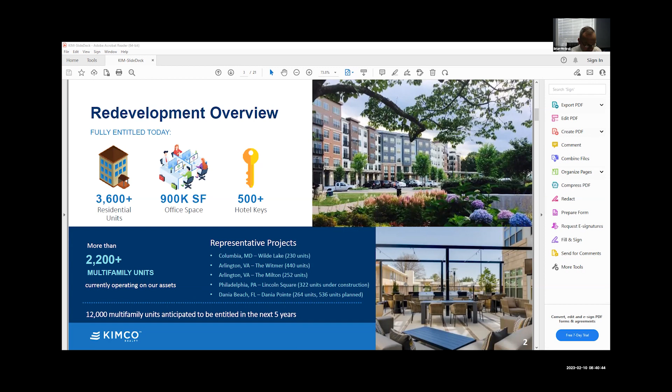In fact, Erica Kinder, our Community Economic Development Director, wrote a memo to the zoning board, and she did express concerns as to the size and the parking being provided. She did point out that the property is in the Junction District, and that this multifamily housing development fits within what the housing production plan is hoping to achieve.

So it really does fit within, for lack of a better term, the railroad district, within walking distance to the railroad. It's located just outside of Wakefield Center. It is not a desirable retail location. As Don mentioned, Kimco has a real background in that—that's what one of their divisions specializes in.

You might have seen a sign up there for years trying to market it for retail type use with no success, no interest whatsoever. They have all the major retailers that they do business with, and smaller retailers too, and they have not been able to have any interest from a retail perspective.

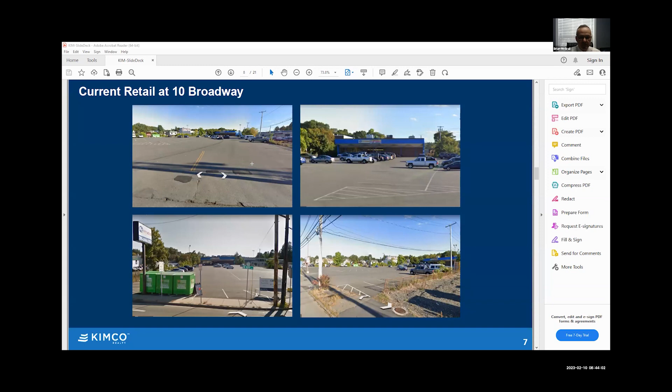As I mentioned, this is just outside of the downtown area, so it has an opportunity to bolster the local businesses in Wakefield Center. It will be within walking distance to the downtown. As we've mentioned, it's going to have an 18% affordable component. We're hoping to create an attractive frontage on Broadway and North Ave compared to what's there today, as a gateway into the downtown area.

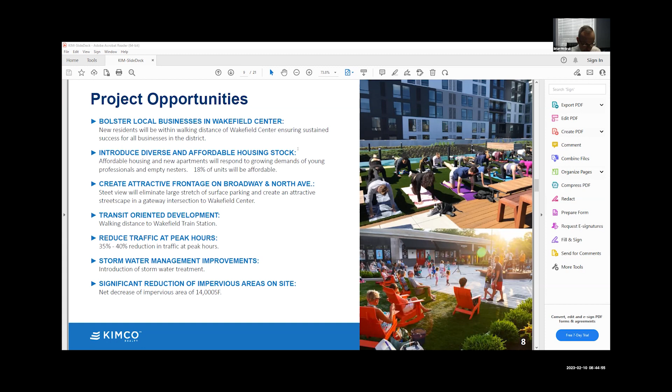It is a transit-oriented development, walking distance to the train station. As Scott will talk about, there's actually a reduction in traffic on peak hours from what is going on there today, which really isn't a major concern for the TAC, but there will be stormwater improvements. There's actually no stormwater treatment on the site today, it's just straight pavement, and there'll be a significant reduction in impervious area at the site.

So as I mentioned, we talked about the units and the density, and what we originally had proposed to the zoning board was 124 units. We did not meet the parking requirements under the zoning bylaw for that size project. We were approximately 40 spaces short. At our initial hearing with the Zoning Board of Appeals, it made it pretty clear to us that what we were proposing as far as density on the site was not acceptable to them, and it was also not acceptable that we would not meet the parking requirements under the bylaw.

So what we're in the process of doing is making some changes to the plan, which will have a reduction in units. We don't know the exact number yet, probably somewhere around 105, 106 in that area. But at the end of the day, it will also meet the parking requirements as required by our zoning bylaw. So when Scott presents today from a traffic perspective, it's a worst case scenario at 124, which we do know is going to be reduced.

I also want to say we spent a lot of time with Fire Chief Sullivan and Deputy Chief Purcell on the layout of the site prior to filing. We appreciate their time on that. And I think, from an access point, fire safety, they were pretty appreciative and pretty satisfied with where we stood originally. And again, the project is only going to get smaller.

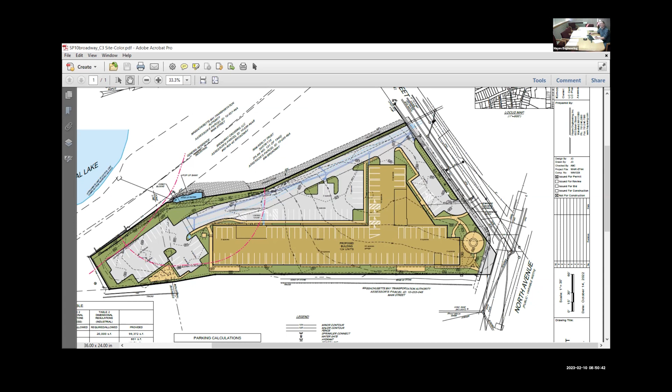There's also a loop in front of the building with some parking in the front, and that will be one-way. It will come through and be exit only at this driveway opening, with a right turn only.

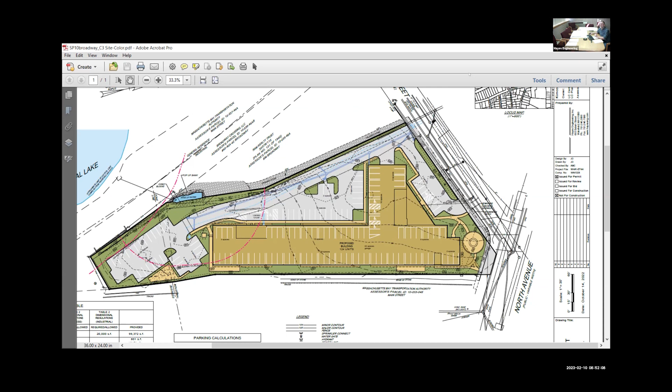Scott, do you want me to use the slides that we used with the zoning board for you? Yeah, sure, that's fine, thanks Brian. That'd be helpful. There you go, Scott. Yeah, there we go.

Again, for the record, Scott Thornton with Vanasse and Associates—we prepared the traffic assessment dated, I think, September 2022. I just have a few slides to go over, starting with this one.

Brian did a good job explaining the site characteristics and the location in proximity to some of the activity centers for Wakefield. You can see on this map the four study area intersections, which we confirmed with the town engineer and with VHB, as well as the Wakefield station commuter rail stop located about 0.4 of a mile up North Ave from the site, and the MBTA 137 bus stops on either side of North Ave at the Main Street intersection. The site has pretty good transit access, and that'll be promoted in marketing materials for the site.

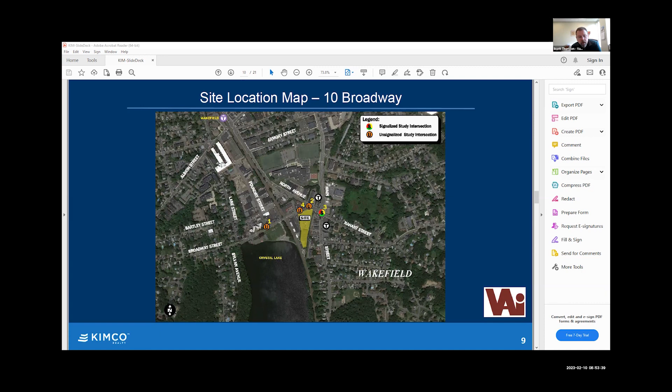We did traffic counts at these locations in February 2022, including the site drive for Mike's Gym. Fitness centers can generate a lot of traffic, and Mike's does. During the morning and evening peak hours, we observed 59 trips total in the morning and 74 trips total in the evening, on an entering and exiting basis. For entering trips at Mike's Gym, about 80 to 90% come from North Ave, making a left turn into the driveway—that's not great, and it causes a lot of friction there. Also, the existing site driveway is pretty wide at 65 feet, which isn't great for definition or for pedestrians trying to get through the area.

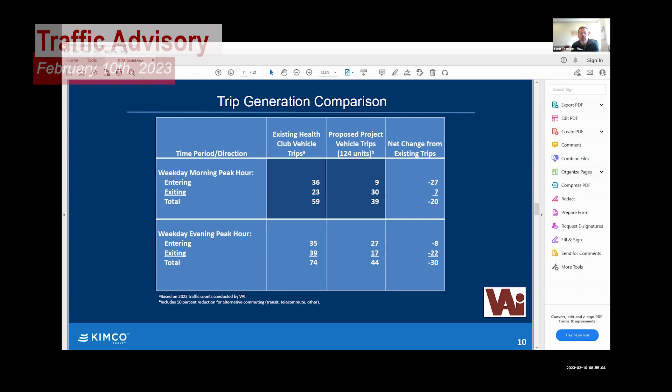Back to the trips—we did a trip generation projection based on 124 units, and took a 10% reduction for transit given the site's proximity to those other transit locations. Compared to the existing Mike's Gym site, we expect the development to result in a decrease of 20 trips in the morning and 30 trips in the evening. If the site is downsized from 124 units to somewhere between 100 and 110 units, these numbers, as Brian indicated, will be conservative.

So the site would generate even fewer vehicle trips than presented here.

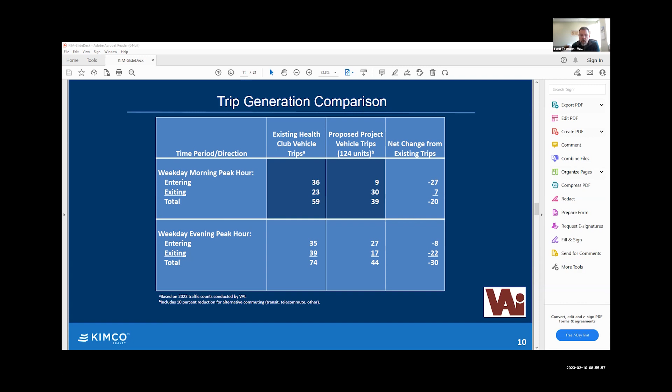So then the next slide just kind of wraps it up. It's a reduction in traffic level from the current use, good transit situation with the reduction in traffic for the site. You have level of service at the intersections that we reviewed. Operations are either the same or improved slightly due to the reduction in traffic. I think from a traffic perspective, it's a good story that development of the site as it stands today would be an improvement in traffic conditions.

So I'll turn it back over to you, Brian. Thank you. And I think that's also an important factor with the morning peak, because that's where the conflict would arise with the middle school.

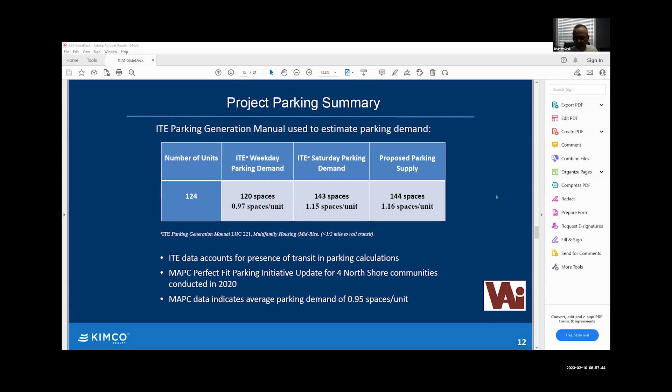Okay, so Brian, how short were you on parking spaces with the 124 units? We were pretty short, I think we were 40 spaces short. John, is that about right? Approximately. Scott? 45. 45. Yeah. Even with a parking garage, huh? Yeah, we were short.

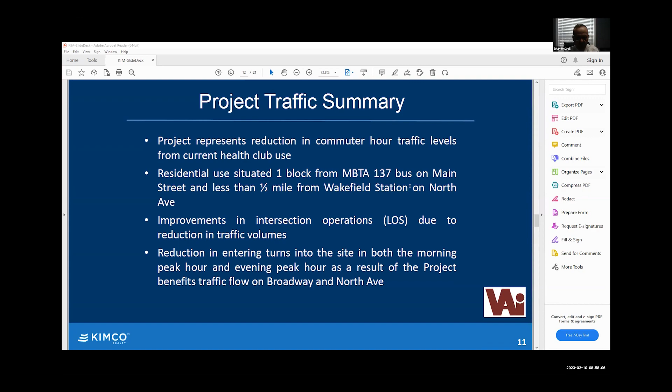Yeah, so because we can't, with the groundwater there, we don't really have an opportunity to go down, to go subsurface, if you will. So, in the unique shape, as we kind of talked about, and kind of going back to this, the unique shape of the lot really limits it.

So we made a passionate plea to the Board of Appeals because of proximity to the train station and walking, and we met the ITE standards for parking requirements of a project of this nature. And Scott made that presentation to the zoning board, but to be honest and quite frank, they weren't buying it. They gave us a mandate and they said, you got a non-starter here. So, reduce the size because we think it's too big to begin with.

And at the same time, that's going to help you meet the parking, which we're going to require you to do. Gotcha. Okay, no, and I agree with that. I think that's always our concern. One of our concerns with development of this size is, where are people going to go if they have no place to park? So if that's already their mandate, it sounds like you're working toward that goal as it stands right now.

I don't dislike what's proposed, and I agree that it may have a trip generation that's quite different from a gym, but it's not so much what's being proposed, it's just the area itself has a lot going on. So I think no matter what you put there, there's a lot of traffic there. There's a lot of traffic when the train comes through and it backs up onto Broadway toward North Ave. You have the middle school there, which is even in the afternoon hours, early afternoon, there's a lot of traffic caused by

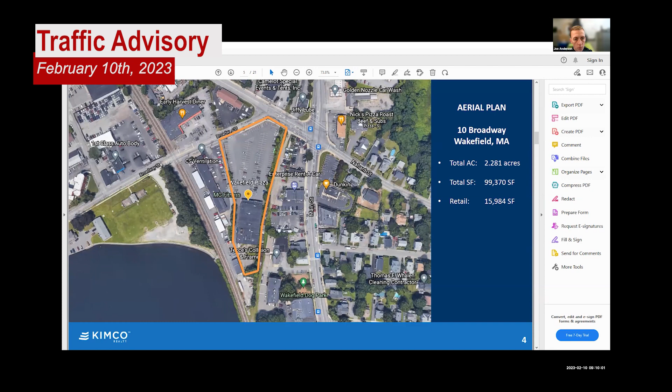There's a building there too, so it's not just a sign, it's the road geometry. So I think overall that intersection, and then the overall flow of the main intersection of Main, Nahant, and North Ave needs to be looked at. So whether it's a signal, whether it's using some of the property at 10 Broadway to create another lane, I'd like to see just a little bit more on that.

And then obviously the parking counts, I'd be curious to see where those come in at with any reductions that the developer considers. Yeah, Lieutenant, we can take a look at those items. And I'm doing the same thing, Matt, just pulling it up on street view. I'd be curious to see where the right of way line is in relation to the shrubbery and the sign, because the sign sure looks like it's got to be on private property. So we'll take a look to see where the public property ends and the private property starts.

Is there any sidewalk between North Avenue and Broadway where the Felitti building is? Any sidewalk at all? On the north side of North Ave, but not in front of the Felitti building.

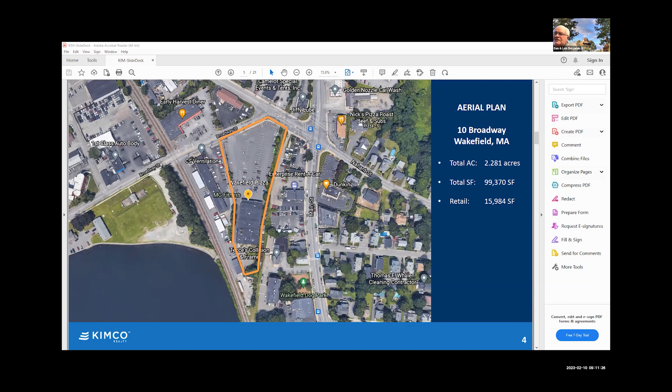All right, any other comments or questions from members of TAC? If I may just make one comment, going back years ago, there used to be access to, I think it's a paper street called Railroad Avenue. And I think it runs in back, if you notice by the railroad tracks at Crystal Lake, the three white kind of triangular shaped buildings, they used to be old Quonset huts and they rebuilt them. But is there a roadway that goes beside them that's called Railroad Street? And I think they have it through the...

No, there's a road that stops at that right of way line. We explored it during the train horn situation back in the day, to see if we could have that as an access point. And the MBTA said basically it's a non-starter to have a crossing there, so that's not happening. So there's one because the street comes off of Main Street. There's like that. Yeah, and it turns around in back of the building. Yeah, it doesn't route behind those other buildings though. Yeah, it never did, or maybe it did at one point, but ultimately there's no access now. And the MBTA has told us that's not going to happen.

All right, I'm going to open it up to members of the public. If anybody has any comments from the public, if you could raise your hand, state your name, and we'll give you 3 minutes to present. So anything on 10 Broadway from members of the public?

Hearing nothing from the public, Brian will close out. We're happy to take a look at the issues raised by the TAC. If it's okay, we can work through Bill Renault in town engineering, since he has access to Matt Keeley. We'll run our findings through you, Bill, since you'll vet it with Matt anyway. Sounds good, that works. Hopefully we can get some answers and see what we can do.

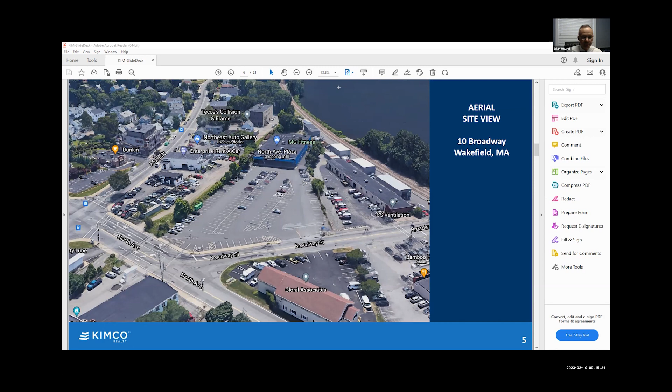All right, so we're going to close out item number 5 and move on to item number 6. Unless Brian, you have anything else? No. All right, thank you very much.

Item number 6 is 314, 330, 336 Salem Street - a new development assessment and site plan review for a proposed 3-story, 19-unit apartment building and 1 new single-family home. So kind of a different one. I'll let Brian McGrail present.

Thank you. For the record, Attorney Brian McGrail, representing Granite's Family Trust LLC, under agreement to purchase the properties at 314, 330, and 336 Salem Street. With me today is John Ogren from Hayes Engineering, our site civil engineer, and Bill Bergeron, also from Hayes Engineering, our traffic consultant. On behalf of Granite's, Bill Mandel and Jim Cook are here; they're the ownership entity. It's almost overwhelming to explain the mix of existing uses on the combined properties - it's really a tangled web. There could be a textbook in poor planning, and this proposal is an opportunity to clean things up at this intersection at Salem Street and Lowell Street. I'll do my best to lay out the existing conditions and then get into what we're proposing.

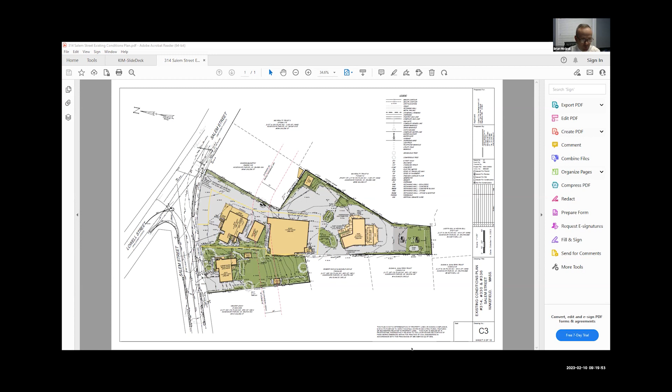Because right now, I'm going to switch maps if I can, to show you what's actually happening on the ground.

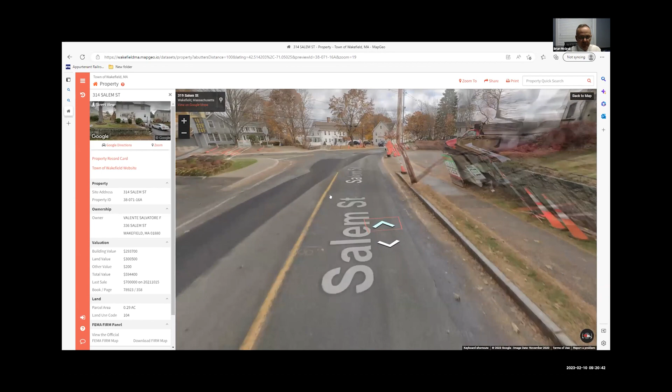So this is 314 Salem. It's a two-family house. It's got its own drive, its own curb cut on Salem Street. And as you come around, on the opposite side you've got the Prime gas station.

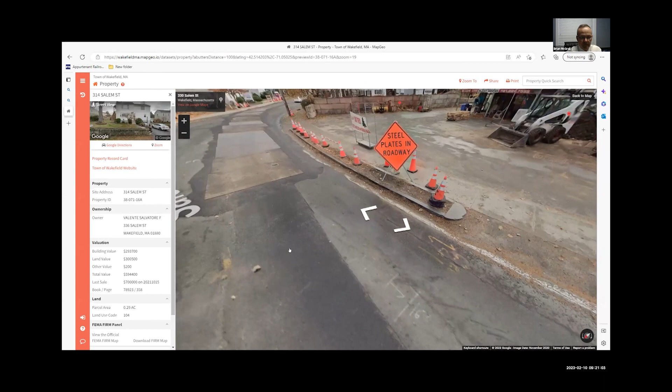This is the 330 property, and you can see it has two curb cuts. So now you've got 1, 2, and this is a wide one. Then you've got another curb cut, and this curb cut is kind of a common driveway that serves the 4-family building and the storage stuff in the back, and also the single-family house way in the back. So you really have 3 units, and a bunch of different stuff going off the site.

Some of the neighbors across the street have attended the zoning board and talked about what's going on here, and how they're very encouraged about the opportunity to improve it and organize the site in a tidier fashion. It's an opportunity to detangle this web.

The property up front is partially in the business district, and in the back it's in the single residence zoning district, hence the two single family houses out back. It's a very challenging intersection, as I'm sure the traffic advisory committee is familiar with.

Historically, there's been a number of zoning complaints going back to Jack Roberto's day as building inspector. He was out here quite a bit, and because of all the stuff going on he determined it was legal non-conforming. There's really nothing that can make it not happen, but there's certainly something we're talking about now that can actually improve it.

When you look at all the residential units there today, 9 of them, none are categorized as affordable units. Our proposal, out of the units we're proposing, 18%, or 3 of those 21, will be affordable and go to our housing inventory.

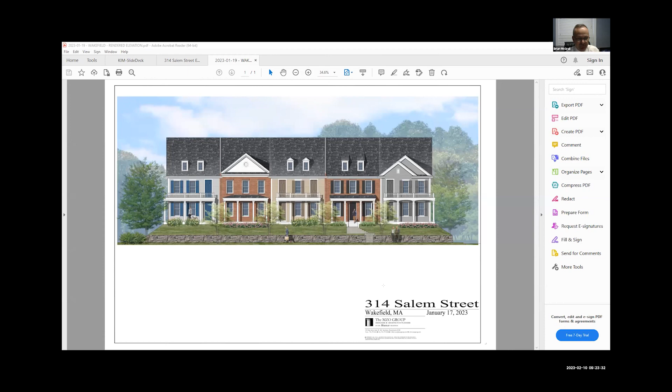Something we're aiming for, this is not at all final, but we're aiming for something like this - this would be like a front elevation. So this is a multi-family building, but to give it a townhouse feel on the front, with kind of a wall, and when you look at this, it's really going to be like a 2.5-story building from the front to kind of fit into that area.

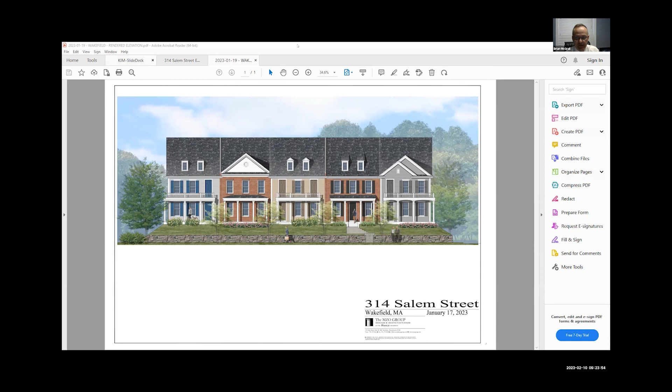But higher in the back where we really wouldn't impact people, with parking underneath, which John will get into, and so will Bill, as far as laying this out. So with that said, I hope that sets the table. I'm going to hand it over to John. I showed you the existing conditions, and now John can show you what we're proposing, and we can talk about the traffic impacts and benefits. John, all yours.

Yeah, unmute, John. John Ogren, Hayes Engineering. I think Brian did a good job of explaining a very confusing existing condition site.

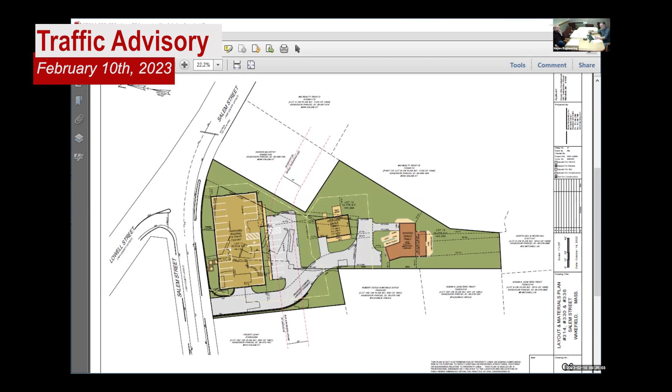So I'll just jump right into what we're proposing. As Brian said, we're reconfiguring some of the property lines to create 3 lots. There's existing 3 lots, but we're reconfiguring those, and that's in the yellow here. This front lot will contain a 4-story, 19-unit multi-residence building. It will have parking on the first level, and it also will have additional surface parking behind the building. So there's 24 in the parking garage, and 9 spaces outside, for a total of 33 parking spaces.

The zoning requirement is 1.5 spaces per unit for 2-bedroom or less, so it would be required to have 29 spaces. So we actually have some additional spaces over what's required.

It's probably best to go over in the front, and Bill Bergeron from our office will go into this a little further, but there's an existing curb cut here, an existing curb cut here, and then the existing driveway to the existing 2-family here. We're essentially utilizing just this curb cut here, and these 2 curb cuts will be eliminated. That driveway provides access to the parking garage and to the parking behind the multifamily, and also provides driveway access to the new proposed single-family residence and the existing single-family residence here.

We did look at this in terms of - these are at a minimum 20 feet wide for a driveway. In terms of access for say a fire engine, they can pull in here. We did some analysis, and they can pull up here and actually turn this around and come out straight, and they don't have to back out onto Salem Street.

Definitely makes a difference, so I think the trip generation is a little bit higher than what's in the memo. I don't think it's going to change the conclusions, but just in terms of us signing off on this, I do want to see the updated numbers for the 11th edition, and changing that independent variable to units instead of residents. I think it's understated in the memo because it was basically saying one resident per unit, which isn't going to be the case. And I think it's more accurate to base those calculations on the number of units.

All right, anybody else from TAC?

All right, I'll turn it over to public comment. If you have any comments on this proposed development, if you could raise your hand and state your name. I don't see anybody. If there is, if you could just unmute and state your name. All right, last call for public comment on item number 6.

Sorry, Joe, one more question. How many stories was the building again? The 19 units? Because of the topography, it's going to look like a 2.5 to 3-story building in the front, as I showed it, but then it falls off in the back, so it will be classified as a 5-story in the back. 5-story? Yeah, but the architectural aspect of this is very early in the process with the zoning board. As I said, the first building that we presented to them, they did not like it at all. And it was more of like a multi-family looking dwelling, and they did not think it fit into the area. So they sent us back to kind of square one from the drawing board. The footprint's not going to change. It can't change because of the zoning district lines, but the way the building is going to look is still kind of in the works with the Board of Appeals.

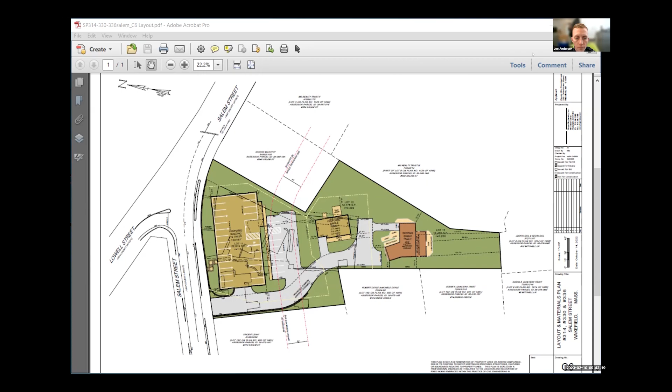Item number 7, 369 to 371 Main Street, traffic impact assessment and site plan review for proposed restoration of an existing building and development of a new 3-story multifamily housing development. A total of 20 proposed residential units between both buildings. And we have Attorney Brian McGrail. Thank you, I'm just going to bring something up on the screen if I may.

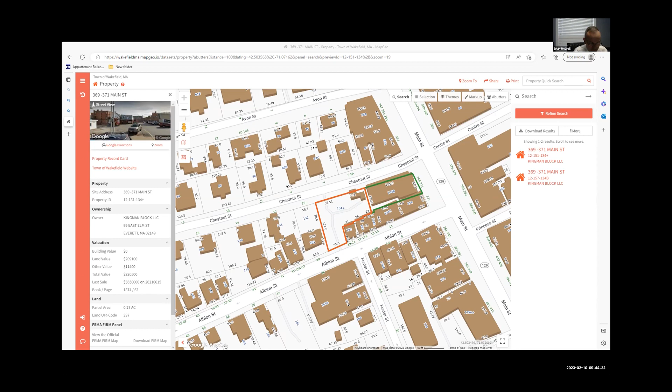I think when we look at the streetscape, the board is pretty familiar with this building. There's a lot in the back, the drive-through, and the building itself. There's a long history of this building. Many people consider this building the centerpiece of our downtown. It was once Wakefield Trust Company, became Shawmut, became Fleet, became Santander, and it always had existing offices rented out on the second floor or used for banking purposes.

Time has passed this building by for use as a bank. Now the new banking concepts, you can see what Santander built down the street or where they're occupied down the street - that's the new model for branches, because this is a branch, not the main home branch of a bank. So banks really don't go into branches or open branches in buildings of this nature anymore.

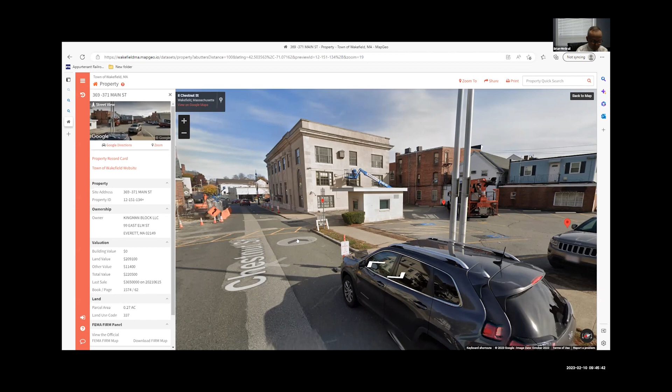So it was being sold by the owner, and it was on the market for quite some time with no buyers. When properties are like this on the market, I get a lot of phone calls because of the nature of my business from interested buyers on what they could do. And I can tell you that many of the potential buyers of this building were interested in the option of razing the building and just using the 2 lots, which I thought was kind of a non-starter, but that was a lot of potential buyers.

Bill Tebow fortunately went in a different direction. He fell in love with the building, and he saw the opportunity to revitalize it and put it into mixed use in the downtown area, and thought it would be a great spot for a restaurant use with offices above in the original bank building, and then a new 20-unit residential building in the back with parking underneath, because to do the rehab on this building financially, just having a restaurant in it doesn't support it. The residential component would help support that and make it financially feasible.

So Bill endeavored on that, and we put plans together. The original filing on this was for a 4-story building in the back in the parking lot area with parking underneath, and 20 units in that building. And then the bank building would have on the first floor a restaurant, and then about 10,000 square feet of offices up above. So the mixed use would be restaurant, offices in the old building, and then residential in the 4-story building in the back.

And when we went to the zoning board originally as part of our filing, they did not support the 4 stories in the back. They didn't like the massing because it was taller than the original bank building. And they also did not support the 10,000 square feet of office space because of parking concerns, because it would have put us pretty significantly short of parking, notwithstanding that we were in the downtown area and really close to the train station. That was made pretty clear to us that it was not going to be acceptable.

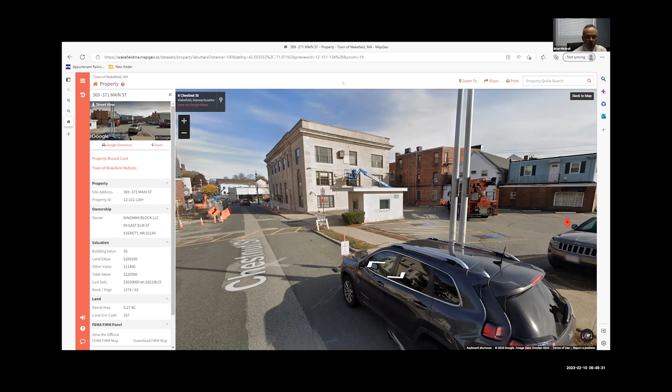With that said, I'm going to share a different screen, if I may, to give you kind of an architectural feel how this is going to work.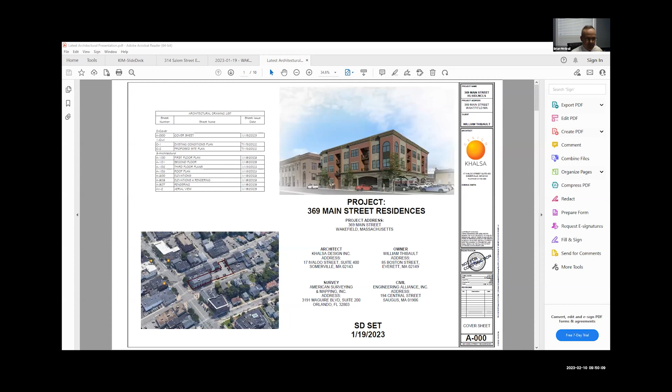This is down below on the left. This is the site, kind of in red, and this gives you an idea how the buildings match. The parking will be under, and there'll still be a flow through to Albion Street through the building.

And there's going to be a connector. Rick will get into the site plan in a little more detail, so that you can see the connector up high going between the two buildings. So these folks that are going to be in the bank building, their units will be able to go across and go down and access the parking area. Kind of a neat layout.

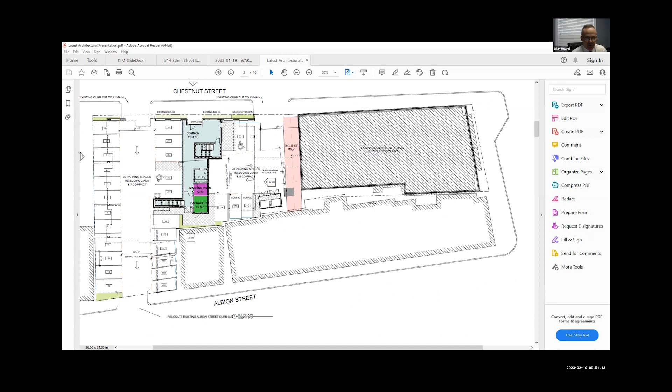There's some right-of-way issues here and easement issues, and I've spoken with the town engineer, Bill Renault. He wants to look at that with me and town counsel to kind of vet the rights, because the town owns a building on Albion Street, which is a cultural exchange, and there's some desires to have a cooperative working relationship on some access there. So we're aware of that, and we're going to work with Bill on that, talk about it, and see what those rights show to be.

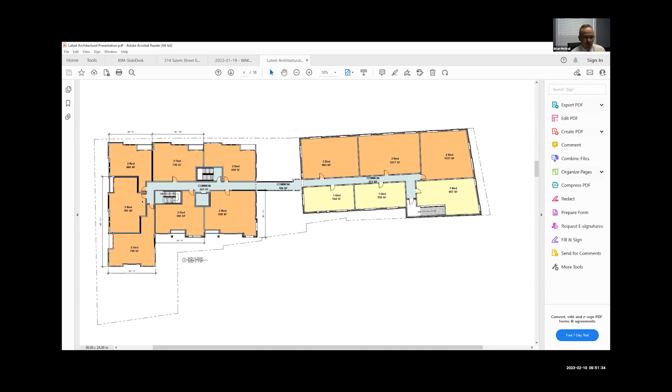So this is the second floor where units will be, and again, the restaurant space will be part of the second floor. Then the lower restaurant will be open above to the cathedral ceiling, preserving a lot of the historic components of the bank inside. The third floor will have units, and they'll connect to the units in the bank building. I'm going to kind of go right to this, which is a shot at the elevation.

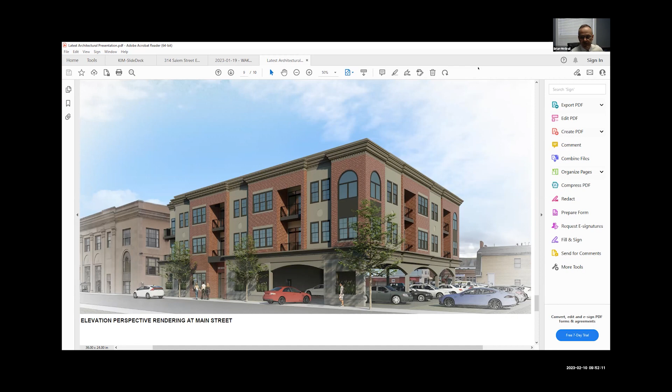This is kind of the version that the zoning board has, they went through a lot of different versions. As I mentioned, this was originally proposed to be 4 stories. It was going to be higher than the bank building, and they required us to knock it down. They talked about different materials, how some of this building matches what's going on with the bank building and the brick component, but that's really not jurisdictional for you, though it has been through a long vetting process with them from an architectural standpoint.

With that said, I'm going to hand it over to Rick. Rick, are you there? Rick, can you bring up your site plan? Is that okay? Yeah, I can. No problem. Okay, great. Thank you, Lieutenant.

For the record, Rick Sal with Engineering Alliance. Brian, I think, once again gave a great overview, but just to supplement it a little bit more, this is an aerial view: the bank building, the parking lot, the ATM or drive-through structure over here, Chestnut Street, Albion Street, which is one way, and Main Street in the front.

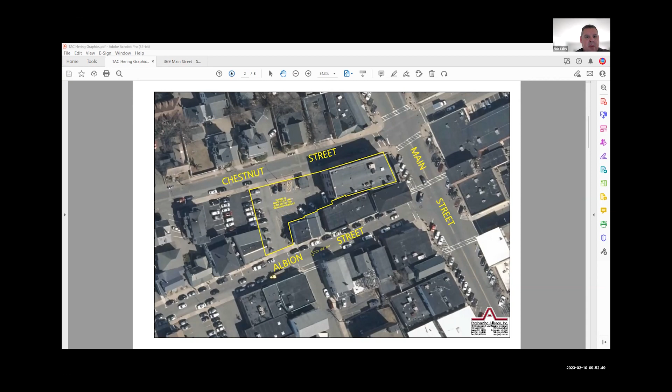As Brian said, the proposal here is to construct a 14 unit building with a footprint of about 6,000 square feet. One-way access from Chestnut Street through to Albion accesses this parking field underneath the building, and there's a 2-way access to access another parking field. There's a total of 28 spaces: 18 standard, 8 compact, and 2 accessible.

We worked with Wakefield Light to relocate a transformer that's back in here, which is very difficult for them to get to. So we're going to put it out here, and it will be a shared transformer for all the buildings in the area.

Trash pickup will be in this area. As you can see, the building takes up the majority of the lot, which is all completely impervious right now. Some green space is proposed along the fringe, the front, and these areas, but by and large it's impervious today and will continue to be impervious.

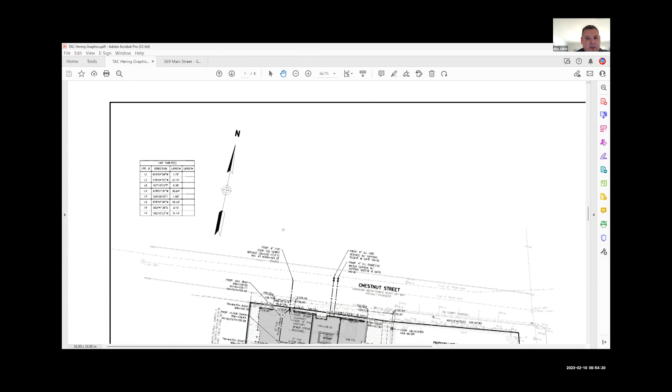As far as stormwater and utility connections, we made out to the respective mains in Chestnut Street. For stormwater, we'll be infiltrating the roof of the building, which will result in a net decrease in the rate of stormwater runoff. The floor drains underneath the building will drain through a gas trap into the sewer.

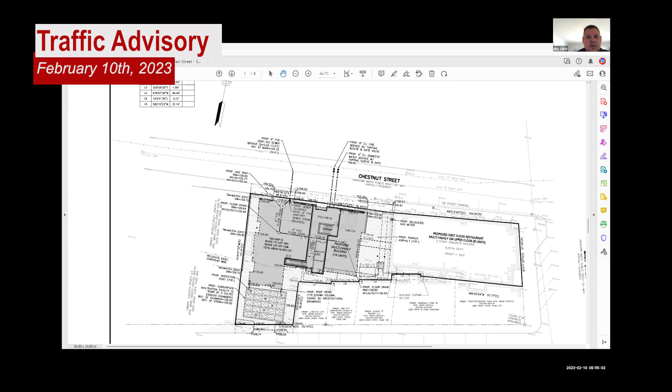Since we have such a small amount of pavement sticking out around the edges of the building, we're proposing a pervious pavement solution. The drainage results in a significant net decrease just by infiltrating the roof, but we're trying to do the green responsible thing with pervious pavement in these areas, resulting in a net decrease of zero stormwater leaving the site.

Just to see how it fits in with the neighborhood here - as Brian mentioned, this is the upper level connector that would connect above, one-way circulation through to Albion Street, with a full access driveway here. I'll turn it over to Scott to run through the traffic impacts.

Yeah, and Rick, thanks for correcting me - it went from 15 in the back to 5 in the front in the old building. It's actually going to be 6 now in the old building and 14 in the new building. That's right, I think 4 of those are 1-bedrooms and the balance are 2-bedrooms. Thanks for pointing that out.

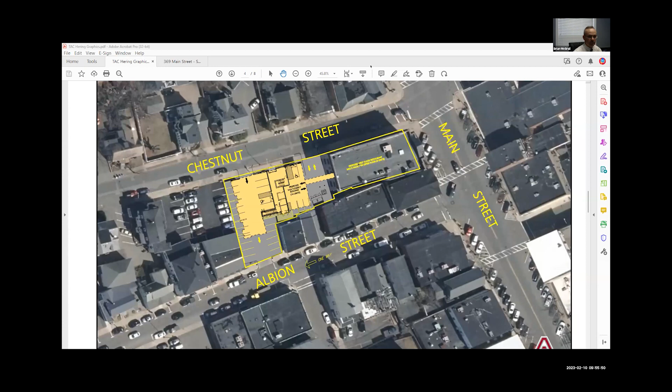So, Scott. Okay, thanks Rick and Brian. Brian, do you want me to share my screen? Oh, that would work, right? Yep, okay. Can you see that?

Yep, perfect. All right, thanks - Scott Thornton with Vanasse and Associates. Brian and Rick did a great job walking through the site. This site location map shows the site in proximity to the study area intersections we reviewed, and also in proximity to transit facilities. You can see the train station is about a quarter mile to the west down Albion Street.

The 137 bus travels on Main Street and stops in this block between Lincoln and Water Street, about 2 blocks away. We discussed the study area with the town engineer and with VHB, and included these locations for study, including the 5 intersections around the periphery of the site, including the existing driveways for the bank, going down Main Street through Water and West Water, Armory Street, and down to the North Ave intersection, and back up to Albion Street.

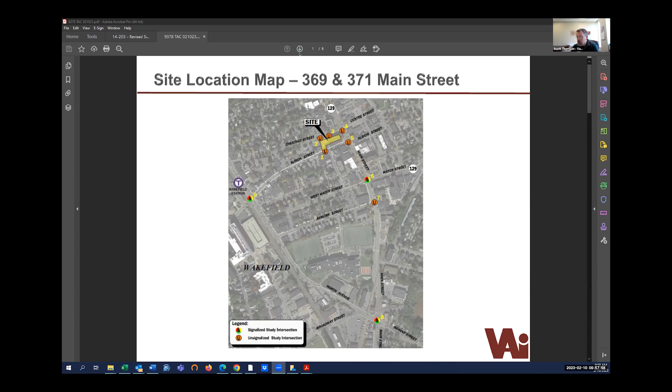We did traffic counts at a number of these locations in June of last year, and then supplemented those counts with other data we had for some locations. In terms of trip generation, we did counts of the existing site, and with the ATM and other functions using the driveways, we counted a fair amount of site traffic there, with 25 trips in the morning time period and 42 trips in the evening time period.

For the project consisting of the residential units and the restaurant, we used the ITE data unadjusted for the residences, but based on the proximity of other uses and the general pedestrian activity in the area, as well as proximity to other residential and employment uses, we anticipated a 50% reduction in the ITE traffic generation for the restaurant. This is similar to a pass-by rate, which we didn't use - pass-by for a restaurant use like this could be in the 40 to 45% range.

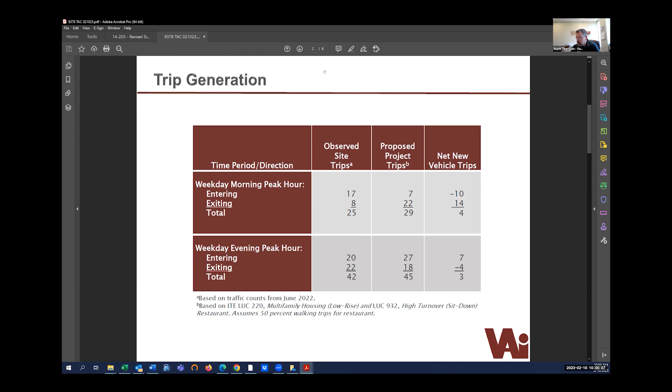We thought it was appropriate to use a 50% reduction, assuming half of the trips to the restaurant would occur through pedestrian activity. The restaurant isn't expected to be open in the morning, so there's just a traffic component due to the residential use, whereas in the evening the restaurant would be open and the residences will also be generating traffic. Still, in terms of net traffic increases, we're looking at a pretty small increase, about 4 trips in the morning and about 3 trips in the evening.

We also looked at parking, and as Brian had indicated, we're looking at about 28 spaces for the residential, and we anticipate that the restaurant parking demand can be met on street. We looked at the ITE parking demand data, which showed that in general the residential uses would be expected to have a demand of about 13 spaces.

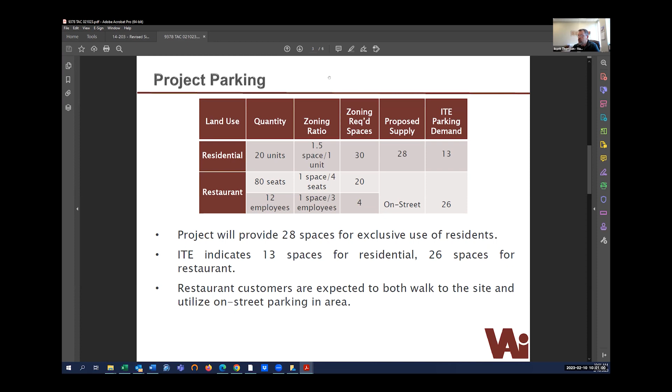The restaurant demand would be expected to have a demand of about 26 spaces, which is close to the zoning requirement of 24. So we looked at the availability of on-street parking in the area, and just in the immediate vicinity of Chestnut Street, Main Street, and Albion Street, there's about 60 spaces. It's a mix of accessible, a couple 15-minute spaces, and the majority are 2-hour spaces that could be utilized by the restaurant patrons.

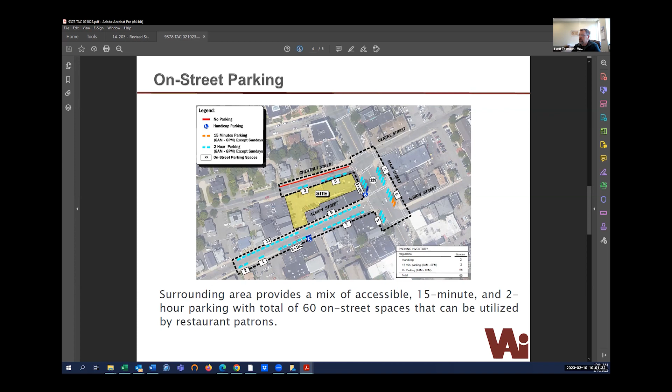If we expand that review a little further, this is from the parking map provided by the town, and there's a fair amount of parking spaces within a quarter mile of the site, a total of about 98 spaces that exist. These are quarter mile walking distances, not as the crow flies, but all within a quarter mile walking distance of the site.

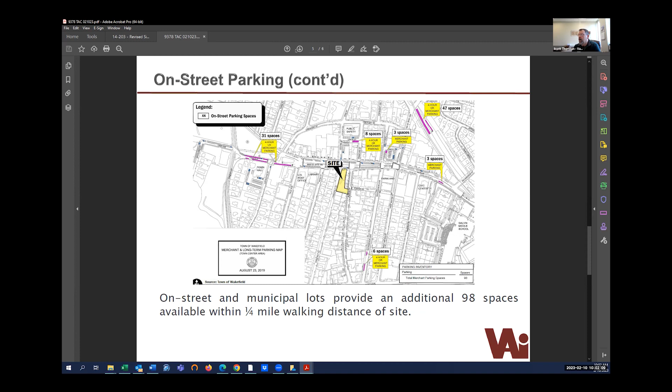So there's substantial on-street parking capacity in the area. Just to summarize: slight increase in trip generation, no change in level of service, close proximity to transit use, and we think that we can accommodate demand of 26 spaces within the 158 spaces that exist on street within a quarter mile distance of the site.

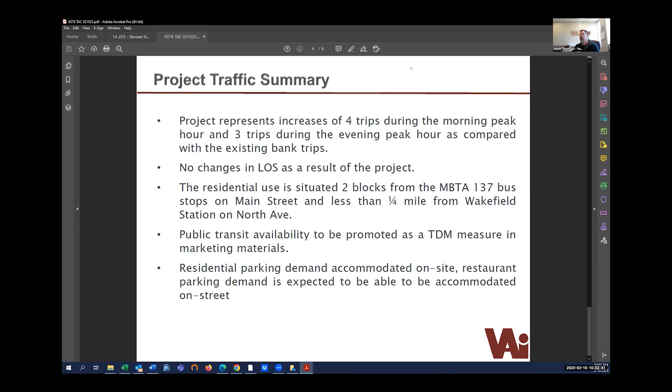That's it for traffic, I'll turn it back over to you, Brian. That's what we have, Lieutenant. Again, I think it's another great opportunity to reuse a site in a good way and preserve a site at the same time.

Okay, excellent, thank you. I like the site, I like the proposed use. I think it's a unique way to use what's existing, and I like it. I'm not really concerned about the traffic end with a development like this, but parking would be my only kind of asterisk.

I'm less concerned with the restaurant space, more concerned with the parking for the residential side of it. So would it be apartments or condos with deeded spaces? How would this work?

There's no word yet on that. It's probably going to be a rental building, that's my guess. Yeah, okay. But not 100% sure, that's where he's leaning pretty strong. Yeah, I know the site kind of limits you.

I would like to see the parking met, but I also understand that you're very close, and the site kind of limits what you can do there to get creative for squeezing in a couple more spaces.

I would say that if approved, any memo would have to include the understanding that any residential permits would not be allowed for streets like Chestnut Street. That's very typical of what we do in town for developments like this. They're not allowed to purchase any available on-street residential permits, and with the other understanding that the restaurant employees would be able to park for more than the allotted 2 hours in a merchant space, but that space is a little bit of a walking distance away. It's not inaccessible, but they'd have to pay for a merchant pass to be there for the entire day if they were coming in within that restricted time period.

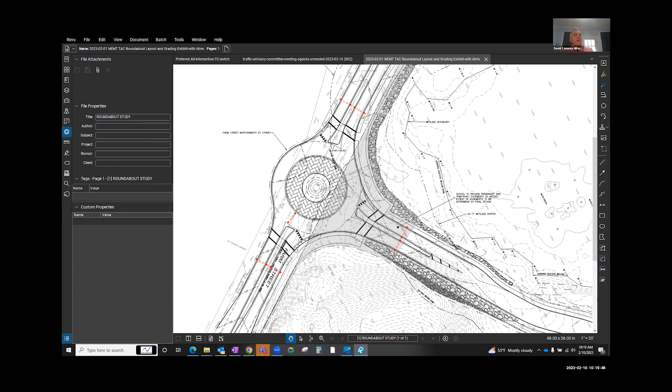Yeah, we can walk through the site. If I can share my screen, I think we're gonna kick off. Sure. So can everyone see this? Yep, we can, all right.

So just to recap, this new school building will be located in the center of your screen up here. The existing school building is at the lower campus area. This will be new fields. We're developing parking in the lower campus. There's sidewalks, there's an accessible walkway from the lower campus to the school itself, which is accommodated by a boardwalk that's kind of floating above the grade. If I zoom in a little bit, we can see the boardwalk.

With accessibility also through the locker room building on the lower campus. So most of the parking is down the lower campus, and then we have the roadway through, circulation around the school, which will be limited with gates. Because it's a vocational school, there's a need for truck access to a bunch of the vocational classrooms, which happens along this edge, but also along the back edge as well.

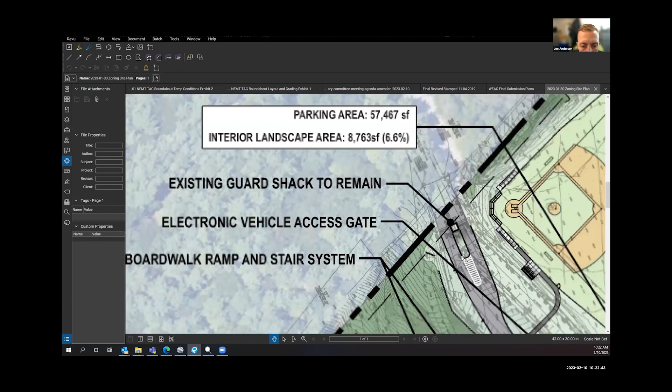Was if you can zoom in again on Hemlock Road, past the gate on that newly created access driveway. They were concerned about the cliff drop off there and the width of that access road, and whether there would be sidewalks along that access road there.

And in speaking to the acting fire chief the other day, and I'm not sure if Chief Purcell's on or not, but we were discussing if there was an incident that happened with a school bus or something like that, en route to the school, that required a fire truck and apparatus to be on there, where would they be unloading students from a school bus or getting people to safety, given the fact that it's a tight access road with really not a whole lot of space on either side, or at least it doesn't appear that way because of the drop off.

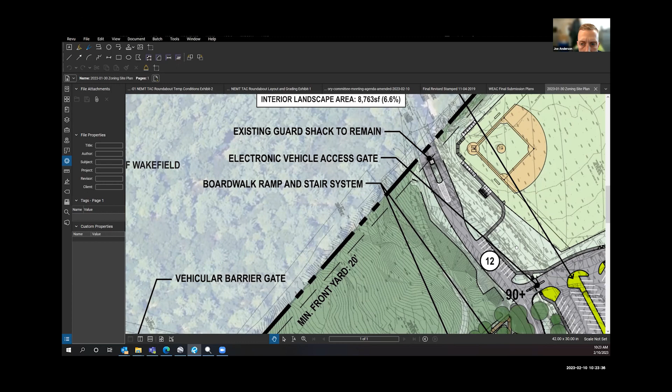Are we talking on the roadway up to? Yes. Yep. Exactly. So maybe you could just dive into the width of the travel lanes, whether it's going to be one-way traffic or two-way traffic, if there is or isn't a sidewalk proposed, because we're looking at it from a traffic safety end.

If something were to happen along that end, like where those stairs are. Right. We have two 12-foot lanes, and the geometry, there's obviously a lot of vertical climb as you're coming up, but we've tried to minimize any of the horizontal geometry. There isn't a sidewalk along that roadway. It was a decision made to not have pedestrians walking along it, first off for accessibility reasons, but also just to separate them from the vehicles.

And there's also, obviously, guardrails along the lower side of it. So it's fairly gentle horizontal geometry running up and down with two 12-foot lanes. I think the total pavement might end up being, what, 25 feet, actually. And then yes, it was a conscious decision to separate out the pedestrian traffic away from that.

Okay, so where would the pedestrian route be? Would it be kind of up that stairway across, or you could walk us through that? Try this. So if you were a student and you were coming up, and that's if you wanted to take the boardwalk, and here's the main entrance here. Okay, and then obviously they could also follow the stairs up the entire way.

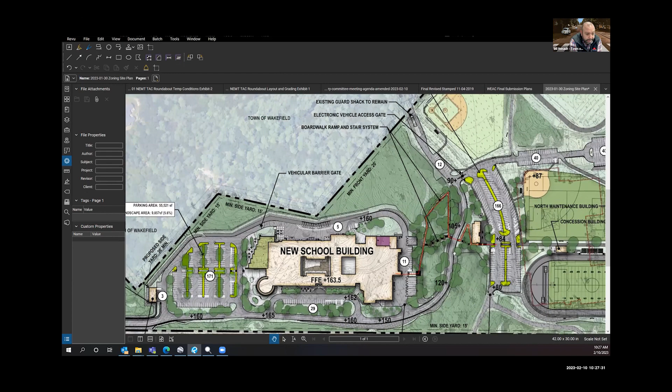Bill, anything on your end? No, from my perspective, I think they addressed the two big questions or asks we had at the last TAC. So the roundabout's in and the sidewalk was installed. Those were the two big takeaways from September. I've talked to them before about my concerns there, and they've addressed them. So I'm pretty happy with what I'm seeing here.

The accessible route going down to the lower campus, though, I don't know how reasonable or usable a 2,000-foot ramp system is for somebody in a wheelchair. I just can't see somebody doing that. So aside from that, we'd probably look at different accommodations to get folks from the upper and lower campus. That's something the schools can talk to you about. And they're going to be presenting at the Disability Commission too at the next meeting, so I'm hoping all of that will be resolved there. Other than that, from my perspective, traffic-wise, I'm good with what I'm seeing.

Let me just jump to Kevin real quick before we continue on, members of the TAC—he has his hand raised.

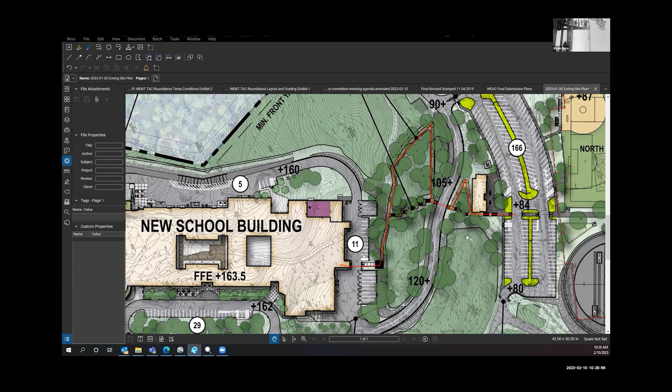Thank you, Mr. Chairman. I just wanted to echo what Bill said. Our engineers have been working very closely with his department on adding the sidewalk and showing the configuration of the rotary. We're still progressing cooperatively through the Conservation Commission process, through our notice of intent process, and we expect to head into the next phase of our order of conditions very soon. I'd like to thank the engineering department and Concom—we've made a lot of improvements to this site by way of storm water and drainage improvements through the review period. We're also planning to submit to the ZBA—we just received our letter from the building inspector that allows us to submit next week.

And as Bill said, at the request of Bill and the town, we're putting together an accessibility meeting. We'd like to host it at the school if possible, with a presentation on the whole project and the accessibility of the whole site. Bill, I think the targeted date for that might be March 6th.

Yeah, March 6th. So I think, Kevin, what we'd do is have you at one of our regularly scheduled Disability Commission meetings—it's a Zoom meeting typically. We're going to invite all the different commissions to attend, so you'll have one set of comments and questions in one meeting that covers all of that, rather than hearing from different commissions separately. If you have to come back in the April meeting to address some things, that would probably be the process.

We watched the video from January 6th, and we'll watch the video from this week's commission meeting too, and be prepared to answer all those questions so they can give advice to the ZBA. Hope it doesn't take more than a meeting, but we're there to listen and present. Right on, sounds good, appreciate it, Kevin.

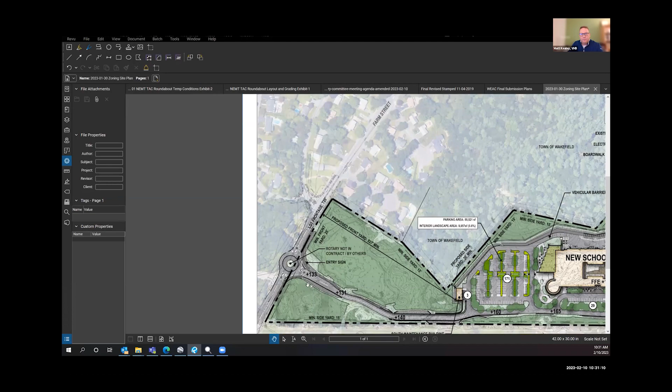Is there any way to smooth out that little kink just to the east on the new driveway? It just has that little... Yeah, right there. Oh, on the driveway—right where it says 131. Yeah, that's to avoid wetland impacts.

The one you saw in September had a bit more—less horizontal geometry. We worked hard through the fall to make this less impactful to the wetlands. So the alignment you're looking at now doesn't fill any of the jurisdictional wetlands, has wildlife crossings, and we've tried to minimize—can't say eliminate, but minimize—any work within a 25-foot buffer. So those are all important points, and that's why we have the little wiggle.

You could look at that island, the median thing that you're doing there, and maybe look to shrink that. It doesn't necessarily need to be that long. You could look at it from that perspective too.

We wanted to be conservative with the impacts. We didn't want to oversell anything. So as we refine it, if that island wants to be something smaller, we can pull those impacts farther south. We wanted to make sure we weren't being overly liberal with our assumption.

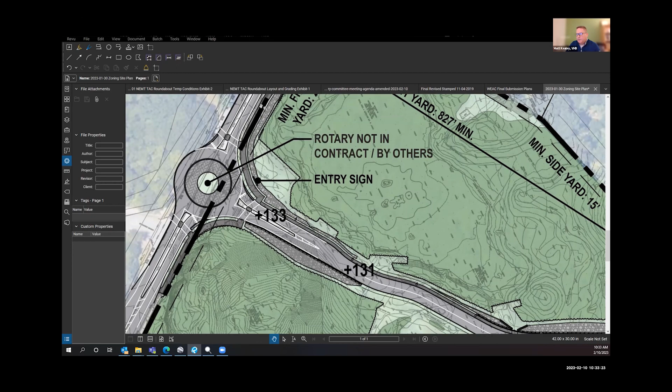The last question I had was on the black and white plan. There was a note that said Farm Street improvements by others, so I'm curious where we stand on how this would get done. The town's working with the school on that - Steve Mayo and I are working with the district. I just didn't know, last time we talked it was a little bit of an unknown.

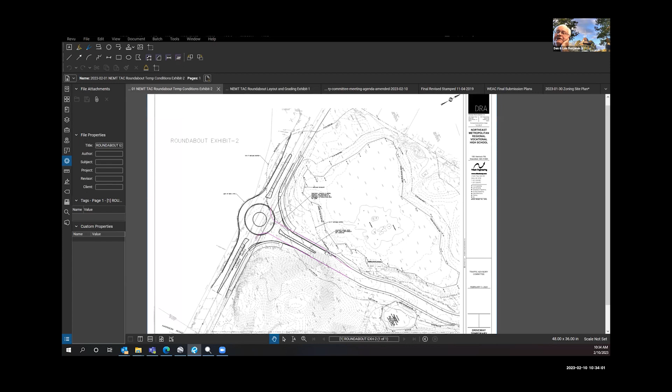Dan and Lois, a couple of quick questions. On the handicap parking, do you have a number how many would be on that upper level and how many would be on the lower level? And is that ramp going down to the lower level covered during the wintertime?

David, would you like Carl the architect to address some of these questions on accessibility? They're really the accessibility experts. That would be great. Carl Franceschi, our project architect from DRA, is on the call, along with Vlad Lubinsky. If we could ask either of them to answer that and walk you through it.

Vlad, I see your name there, trying to scroll through. Would you or Carl like to speak up? Hello, this is Carl Franceschi with DRA Architects. The question was about the distribution of handicap parking, upper level and lower level, and also whether the ramp is concrete or wooden, and how they're going to clear it during the wintertime.

I think we're best prepared to address those at the Disabilities Commission. I don't have the exact numbers of handicap parking spaces, but they are distributed around the proposed building. There are multiple entrance points into the new school - for visitors to the administration, to the restaurant and cosmetology salon, and an events entrance by the gym and auditorium. Each entrance has handicap parking in close proximity, as well as in the rear of the school where there's an entrance to the early childhood preschool program with handicap parking there. So there's a good distribution of parking spaces around the building.

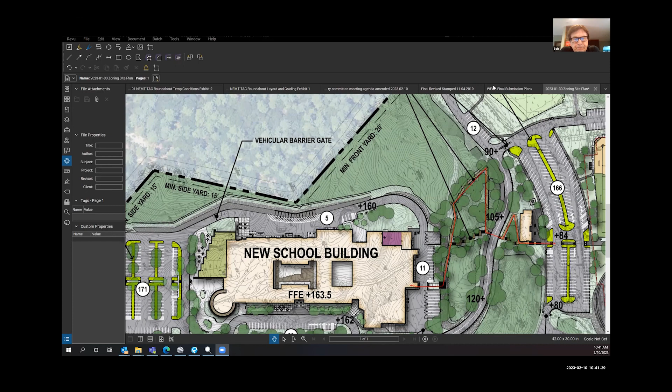Okay, my second question, as far as the maps that's up there now, could we look towards where the roundabout is, the rotary in that area? Two of my neighbors and people I talk to who are both abutters - I won't mention their names, but one happens to live on 161 Farm Street and her house is directly where the roundabout is now, more north facing before Old Nahant Road. She'd like to find out exactly where the house is located compared to that, and she was concerned about issues on how she was going to get on Nahant Street going south or north with the amount of traffic and the backup consistent with coming into a rotary.

And in addition to that question, one of the other abutters, which is a 100-foot abutter from the Saugus area where Harmon Road is - if you look towards the bottom, I don't know if you can see it clearly on that map - they were wondering, coming out of Harmon Road, if they wanted to go south towards the high school, how are they going to get by that middle intersection piece that divides the two roadways north and south? Has that been addressed?

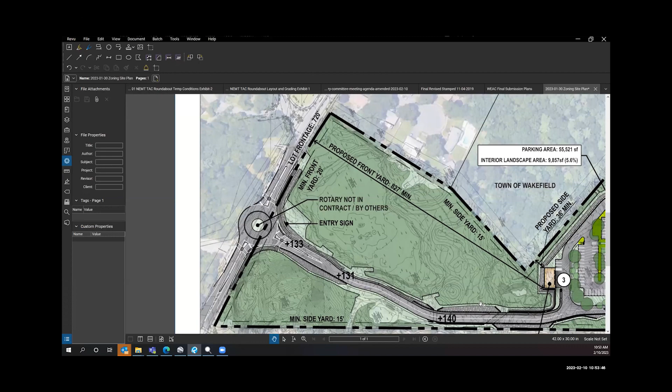I guess I wanted to focus in on emergency situations. If you could, share the screen and scroll to the right closer to the Hemlock Road entrance. As I understand it, the roads are pretty narrow, we don't have sidewalks, and the campus is bounded on the west by a cliff, and then pretty steep riprap walls on the east side.

So I'm curious about these two situations. One, if a student or someone falls on their way up those stairs or along that ramp coming to and from school, and you need emergency vehicles to get in there, how is that going to affect the traffic, and will cars be able to go by if an ambulance is stopped in the middle of that road between Hemlock and the school? If you could answer that question.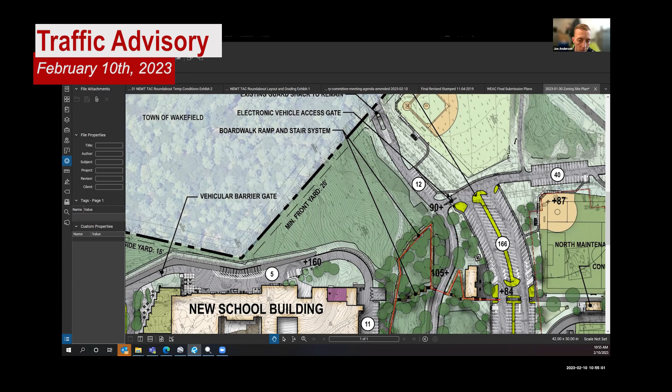It looks like there are 2 lanes with adequate roadway width for emergency vehicles on that access road, right? Anytime you introduce a fire truck or an ambulance into a school circulation, it's definitely going to cause a traffic issue, no doubt. But to your point, it's obviously a narrow access road, but it does have the width to accommodate emergency vehicles and still have that other lane. I'll let the development team give you more on that, unless you had anything else for us.

Yes, if you're satisfied with that, that's fine. My second question is regarding an emergency situation in which you have to evacuate the students from the building and get them a good distance away from the school.

How will that happen, given the campus is essentially bounded in, and either students would have to go down an 8-foot wide steps or the 8-foot wide ramp, or down along the road without sidewalks? I'm just not sure how students would be safely evacuated.

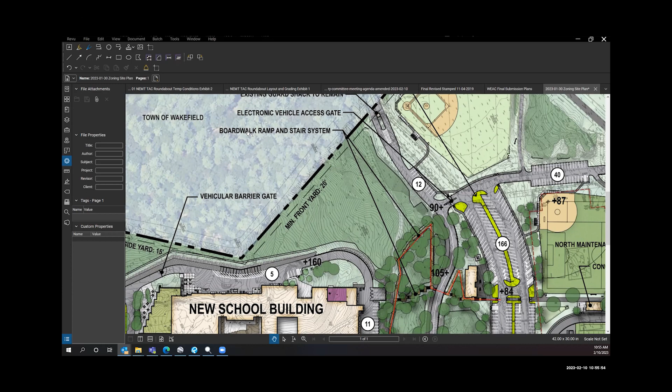The parking lot to the west of the school is fairly large, and the scale of this project and this drawing is very large. The roadways are generous, 25 feet wide, with sidewalks throughout the site. These aren't single lane roads that we're proposing.

The far end of that parking lot from the school is probably 200 feet away, if the school needed to be evacuated. So we hear the concerns, but I want to point out that the scale of this drawing is quite large, and we have detailed drawings if people want to dive into a 20 scale.

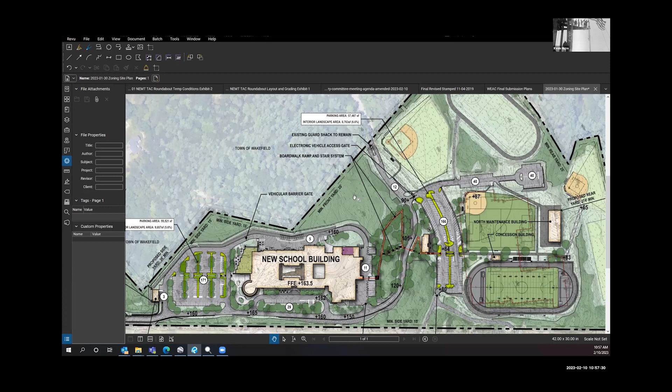Mr. Chairman, this is Kevin again. I believe part of the question is something every school in the state is required to do, which is work with the fire department and building department before occupancy. We'll have emergency evac maps posted in the classrooms, do fire drills in the first several weeks of school, and teach the kids how to evacuate depending on where they are in an emergency. There will be areas of refuge all around the school, worked out during occupancy with the building inspector.

I appreciate the public participation, because there are probably many people who speak before TAC for this development who may not even have kids going to the school, and they're concerned about safety and the plans. But some of these concerns overlap with traffic, and a lot has to do with how the Board of Appeals looks at a development like this. We can only really look at traffic, and it overlaps to a degree when access roads go to pedestrian walkways and where handicap spaces are. There are multiple boards involved, so I'd encourage the public's continued participation in those boards and committees.

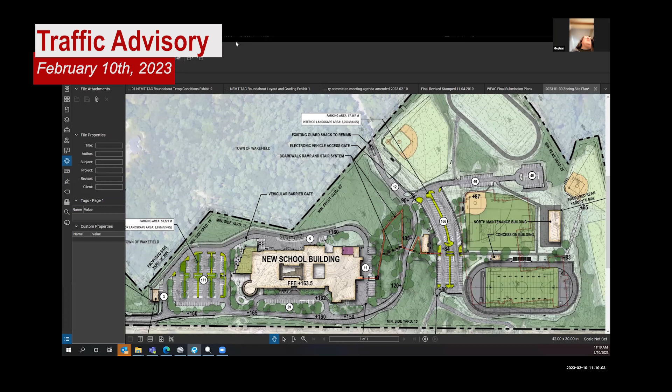Okay, that's great, ongoing. Okay, thanks so much. Is that the same thing as an Office of Energy and the Environment review? That's different, those are different. That's a higher level review for other types if they hit certain thresholds, which I don't believe they do on this project, but yeah, that's different. This is our local conservation commission that looks at the wetlands and all of that. Okay, great, thanks so much.

Well, thank you for answering some of those. Anybody else from the public that hasn't had a chance to speak yet? We do have another agenda item to get to. All right, Paul, I'll give you a minute, and then Bob will give you a minute, okay?

Thank you. Paul first. The only thing I wanted to add was the follow-up I mentioned about people walking up that narrow driveway. What I'm noticing on the diagram is that the main lot with 166 spots is actually sloping downgrade. So people who are parked at the far top of that lot, or the lot with 40 and 48 spaces, are you really expecting them to walk downhill from a 90-foot elevation down to the 84-foot elevation, which would be way out of the way, and then go up a 735-foot ramp or 10 flights of stairs?

I think the way it's designed is going to force people who are running late for class, who don't have the time or want to go the direct route—there's going to be a heavy mix of vehicles with pedestrians. It just looks inevitable, especially with the topography. It would be baffling if you saw students walking downhill past 20 spots to go ahead and then climb the next 75 feet. Thank you very much. Thank you, Paul.

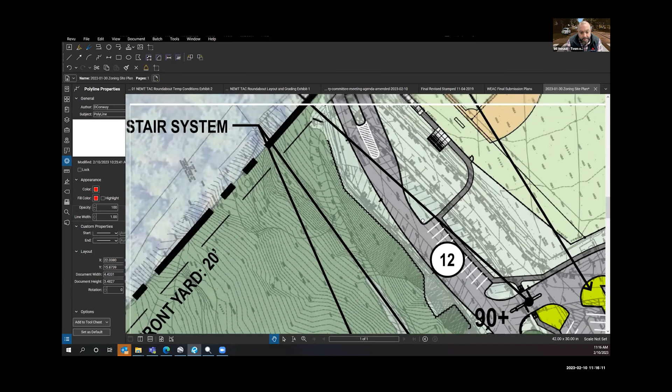Just two quick ones—could you bring that plan back up for me, Dave, if you wouldn't mind? The two questions I have: we're hearing a lot of questions on sidewalks, right? Is there any opportunity to at least extend sidewalks down to the existing guard shack? You have sidewalks pretty much through the rest of the site, and I know it's going down to the ball field. Is there a way to make that happen? It looks like a small extension from what you already have now, or even a small tweak to the roadway to make that work.

We can look into that, sorry, I was muted. We can look into that. All right, that seems like a pretty easy win here.

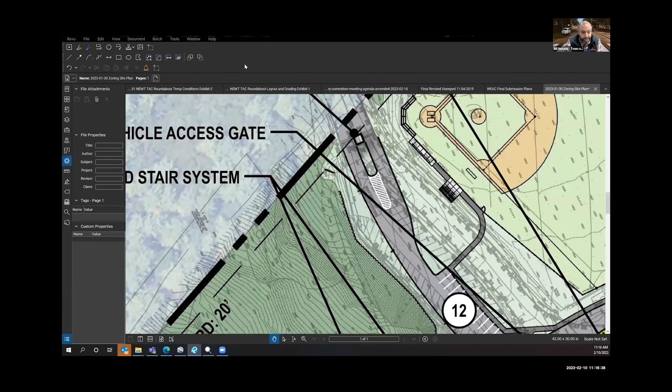The other thing is access to Breakheart, right? Ideally we want pedestrian access to the site for folks that would walk up Hemlock to go there. I see that you have a sidewalk—it looks to me like you have it all the way down in this rendering, right? Is that correct? That's correct. And then you have a series of parking spaces designated for Breakheart still, right? Correct.

Absolutely. We've been working cooperatively with DCR and the engineering staff, as well as the supervisors on site. Access will be maintained throughout construction, and as noted, there is dedicated parking for people accessing Breakheart. We're working through how to secure parking upper and lower with DCR for when they have large events during the summer and things like that. Our dialogue continues with DCR, they've been a great partner so far. We're going to keep those gates open and keep the public safe during construction, and they'll have access after construction as well through the same gate.

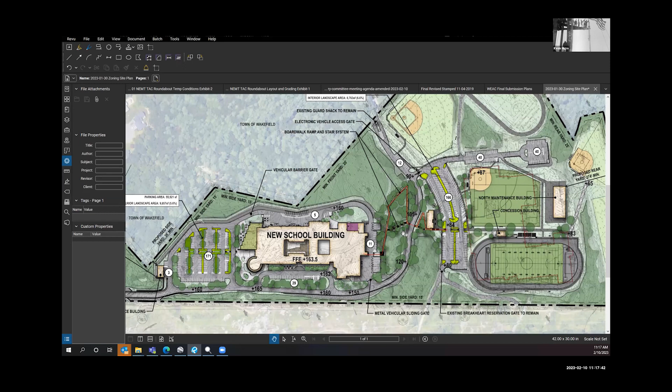So just keep that in mind as you're filing with the ZBA, that'll be a comment that comes your way.

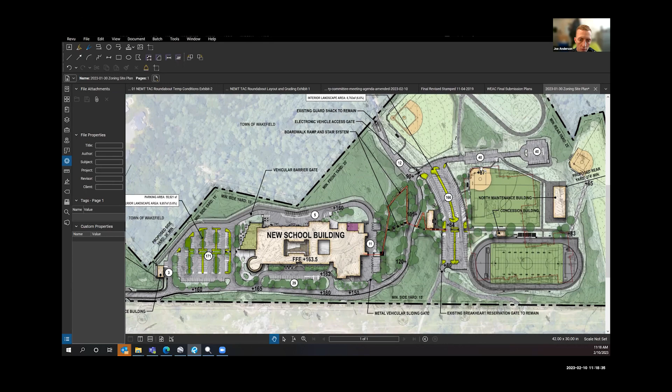Yeah, I agree with that, Bill. I think where the number 12 is there, the extension there, and from the two 40 lots, all that does is encourage pedestrian access to the appropriate channel, right? So a lot of the comments we're hearing is that some kids might use that access road to get to school if they're late.

I also don't disagree with maybe some signage on the other end of that access road that says no pedestrians, something like that. These are high school age kids. So between the school enforcing what the appropriate paths are on their property, signage at the end of that access road, and then encouraging people by adding a little bit of sidewalk from the guard shack and from those two 40-space lots to the appropriate pedestrian channels, I think that's a very reasonable ask on our end.

I like the rotary design. I think it's going to help, especially in concert with whatever might happen with the high school development, to calm what's been an ongoing problem for decades on Farm Street. There's been a lot of talk back and forth about where the turning movements are. I think you can't deny the fact that a majority of students come from outside of Wakefield. Wakefield's one town, and this is a vocational school for many towns.

And a lot of those students come from the Saugus end. It's just kind of the natural flow to the vocational school. So if we can get them into a roundabout and into another driveway that doesn't interfere or congest an already congested Hemlock and Farm, I think that's definitely a win. It's a win for Farm Street, whether it's peak hours or off peak hours.

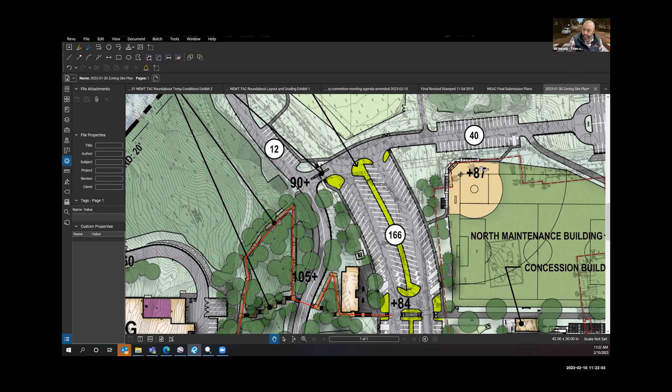I've heard a lot of comments from the public on this, and we definitely hear all of your comments. I think it's important to continue on with the other various boards and commissions that will be reviewing this proposed development as well. So I appreciate the public's feedback. Anybody else from TAC have any comments before we turn it back to the development team?

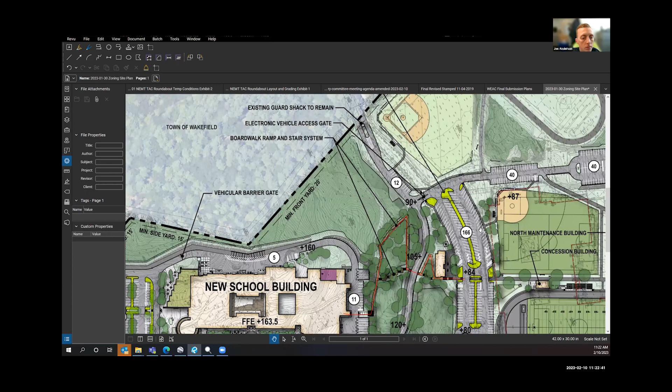I just had one quick clarification. If you could zoom back in right where that 105 was. Just a little bit, just below where the 105 is. I just wanted to, because it kind of looks at this scale that's okay, sort of the elevation. I was looking at the parking count. Go ahead, yeah.

On the west side of the road there, is that like a rocky slope or something? It kind of looks like a path from at this scale. That's not a path of any kind, right? That's a swale. Okay.

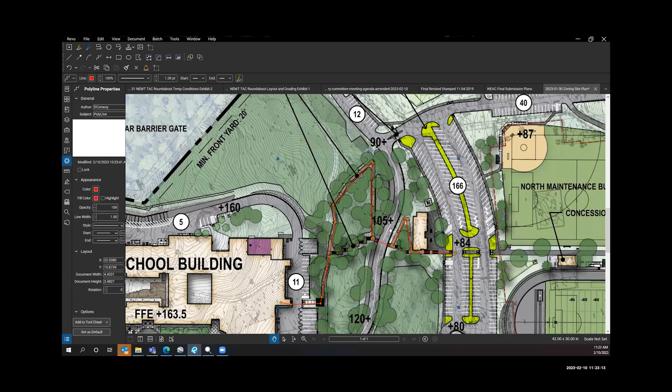Okay. That's it. Thanks, Matt. Thank you, Matt. Anybody else from TAC?

All right, I'll turn it back over to the development team for any closing thoughts.

Mr. Chairman, this is Kevin Nagel. I'd just like to thank you and the committee for hearing us over these three hearings. We look forward to getting your comments, and if we can get anything that has to do with the disability aspect of it first, we could incorporate those comments into our upcoming meeting with Bill's group on March 6th. So again, thank you, and all great comments. Appreciate it. All right, thank you, Kevin, and thank you to the rest of your team.

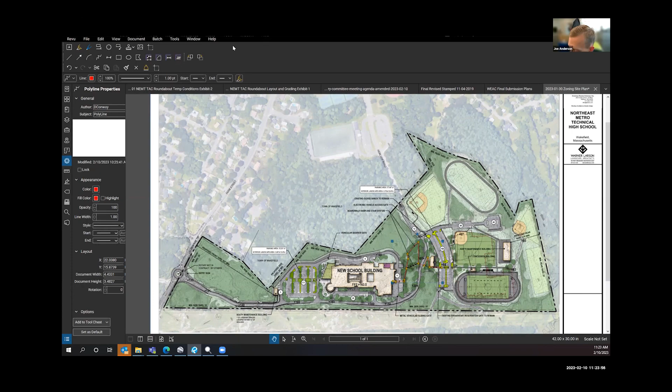That closes out item number 8. On to item number 9, 69 Foundry Street, request for no parking restrictions. This is a request to modify or relocate some of the existing restrictions there.

We did have some correspondence from... we have. Bill, I'm missing the email. I have it, but now I can't find it. I'm looking for it now. Yeah, we just had it too. I just had it. I know. I had it too. All right, so I have it here. It's... oh, here we go.

Okay, Michael Jacobs. He writes that some residents are having trouble entering and exiting driveways on their property at 69 Foundry due to vehicles being parked too close to the edges, which causes a blind spot there, especially with ongoing construction on our street that will most likely be ongoing for a few more years. It's a safety concern, so he's asking for those to be placed a minimum of 10 feet from the edges of the driveways.